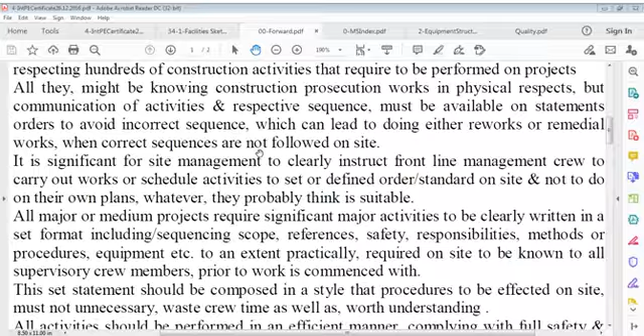It's significant for site management or site organization to clearly instruct frontline organizers, frontline leaders and managers to carry out works.

Written in a set format, including - like what? Number one is scope, references of drawings, references specification, or references manufacturer instruction, or references whatever you think is logical to be included in that paper, that writing. So scope, then references, and what safety methods you are going to adopt for that.

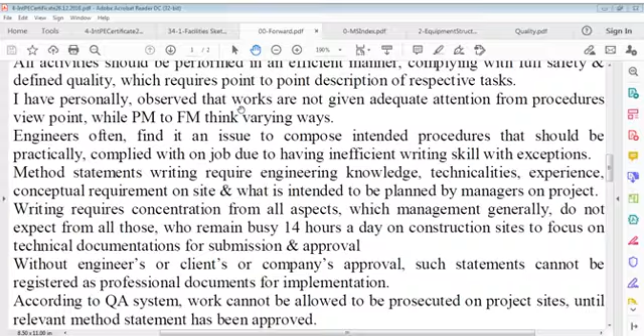Statements. Writing requires engineering, which management generally does not expect from all those who remain busy around 14 hours a day on construction sites, to focus on technical documentation for submission and approval.

Without engineers, clients, or companies' approval, means whatever is written must be approved by all. It should be approved by the company or client, the engineer, and of course whoever is involved, and the contractor has already approved it by submitting this method. If the contractor submits it, or if a third party submits it, then the third party is at their own expense.

So we can say, simply, according to the QA system or QR system, work cannot be allowed to be prosecuted on project sites until the relevant method statement has been approved. These two lines: without engineers', clients', or companies' approval, such statements cannot be registered as professional documents for implementation. And according to the quality system, work cannot be allowed to be prosecuted on project sites until the relevant method statement has been approved.

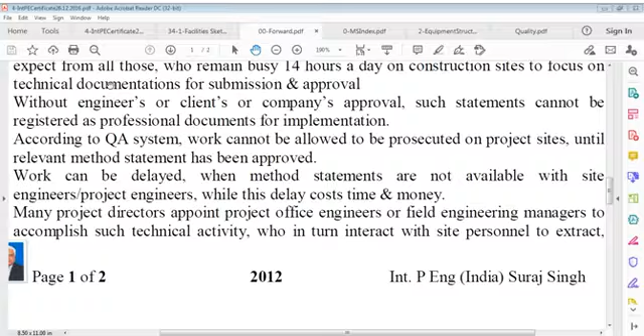Points are noted like a journalist or reporter, and a statement is composed based on collected information. Method statement writing activity requires thorough knowledge about the job in consideration, which are contract requirements - what are contract requirements, what is drawing details, what are all these drawings.

You can say that specifications involvement as industrial practice, and inquiry records such as site technical queries or engineering queries, etc., move together with the project, and all form a basis to complete all columns on the proposed statement, leading to delivery of professional documents to be reviewed by the contractor's management organization, including quality, safety, and to be disposed of for final approval by the engineer or client.

Once a statement is approved, it has to be complied with in letter and spirit as part of contract procedures. While it's a case of proposed deviation, a revision should be issued.

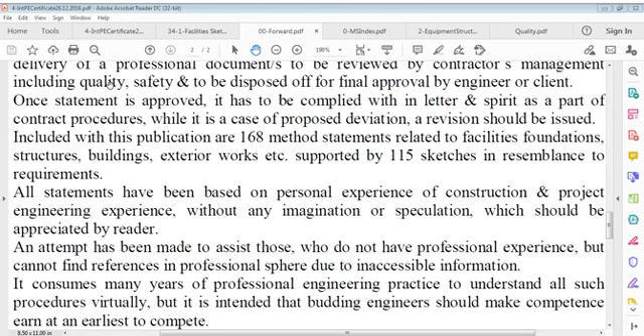Once a statement is approved, it's to be complied with in letter and spirit as a part of contract procedures. While it's a case of proposed deviation, a revision should be issued, included within this publication. There are many other statements that I'll share with you - structures, building, exterior works, etc. shall be included, supported by many sketches in resemblance to requirements.

All statements have been based on personal experience of construction and project engineering experience. Project engineering experience has to put you in trouble - meaning you have to think a lot, write a lot, understand a lot, just to see job success. All statements have been based on personal experience, again I say, personal experience of construction.

All statements have been based on personal experience of construction and project engineering experience, expertise without whatever imagination or speculation, which should have been appreciated by you people, the reader.

Now this was written long back. An attempt has been made to assist those who do not have professional experience or do not have practical requirement knowledge. It consumes many years of professional engineering experience and practice to understand all such procedures virtually. Otherwise, that person is outside.

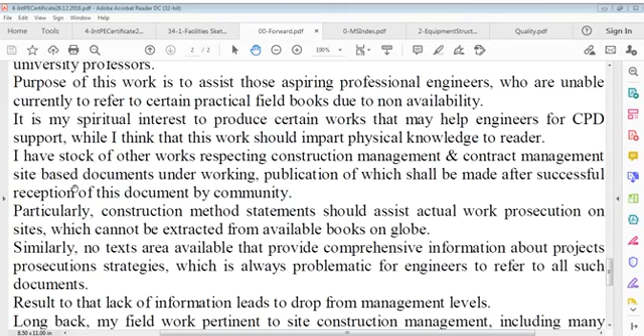No texts are available that provide comprehensive information about projects prosecutions strategies, which is always problematic for engineers to refer to all such documents. A result of that lack of information leads to drop from management levels.

Long back, my field work pertaining to site construction management, including many engineering hand-drawn sketches respecting complicated site fabricated formwork etc., was published by CBS in 1996, which can also be referred to for more details. Materials and vendors' names included somewhere are indicative only and no recommendation. Hope this suffices.

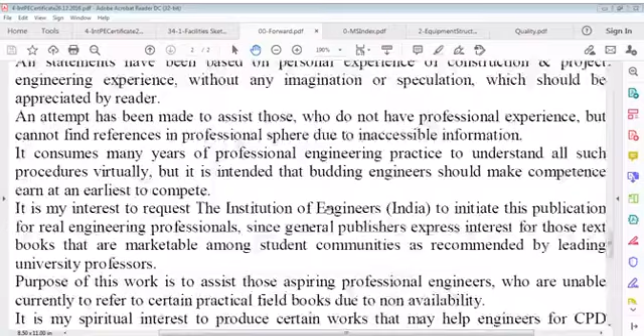This introductory note is just to refer to how this word lies here. What it says, that's more important. Now what actually we are going to talk about, that's also a point. We may see here.

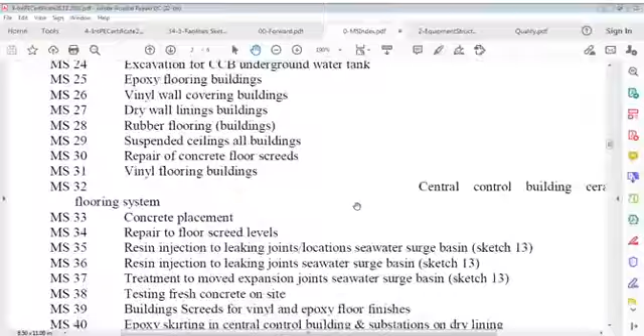This is a kind of scheduled pertinent 168 method statements included within the following chapters: site environment management, then equipment structure, excavations and crossings, buildings and plants, non-plant buildings, infrastructure, then external works and utilities.

These sketch titles, a list of title sketches, are self-explanatory and can be linked to all method statements for a better understanding, but all these are indicative only. I'm just giving sketch names, not numbers, because I'm interested in what the titles are, sketch titles. It's not titles of procedure, no.

Trench excavation safety, railing and ladder - this is one very important point. Safety is endangered while excavating trench, so this is that requirement. Then we have excavation safety of a major building with ordinary foundations without ramp, excavation safety of a major building with ordinary raft foundation with ramp, and excavation safety of a major building with benchings, firm foundation with ramp and diverting well point system.

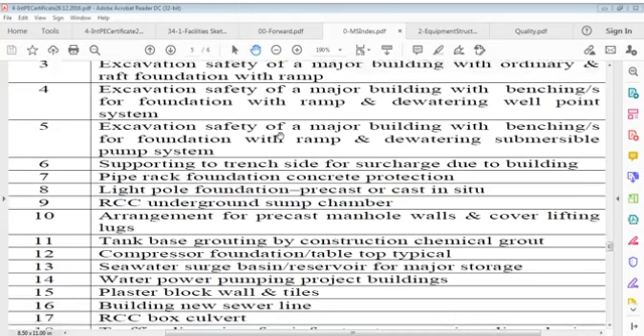Then excavation safety of major building with benchings in foundation with ramp and dewatering submersible pumps. We say supporting excavation safety of major building with benchings for foundation with ramp and dewatering submersible pump system. Then supporting to trench side for surcharge due to building.

Pipe rack foundation concrete protection. Light pole foundation precast or cast in situ. In RCC, underground sump chambers, arrangement for precast manhole walls and cover lifting lugs. Then tank base grouting by construction chemical grout - tank base grouting it is. So it says tank base grouting by construction chemical grout. Before that was arrangement for precast manhole walls and cover lifting lugs.

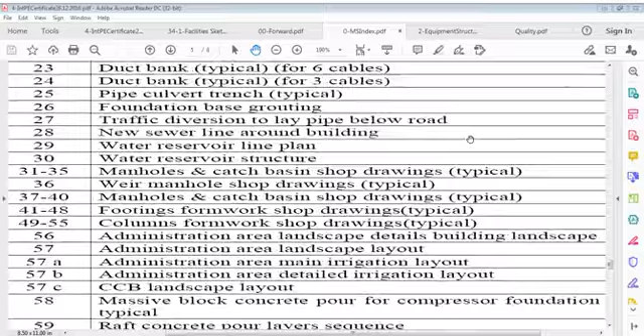It's always easy to say something without thinking, just to speak because I did this and that's only right - no. Technical work means scrutiny and scrutiny and scrutiny: self scrutiny, other party scrutiny, third party scrutiny. There may be people coming in joining engineering and also currently launching.

We have to keep ourselves immersed in such scenario because concentration is very important. It's not simply that I say or somebody else - it's a requirement of deep thinking, not shallow.

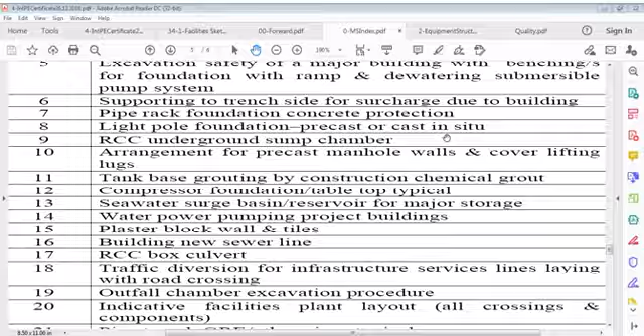So there are so many, you can say, long titles, short titles. You'll come across this as we move forward. There are about 108 here.

Quality is ultimately the aim to achieve. We can't cheat ourselves - we can't say we have done it or not done it when we don't do it. We have to do it, only then can we say we have done it. We have to think of what to do, what not to do.

Again, I am referring to past writing. After all, 50% I say it could be more budget that goes to projects and methods and titles, which is an economic interference, an economic impact on that.

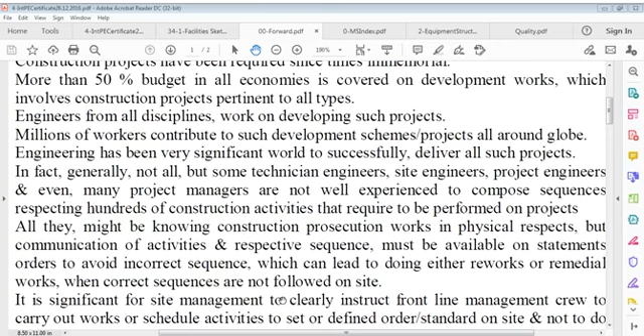It's now very clear that we have to understand it's important. It's very clear in this respect. I'll be back within a couple of minutes. Just a moment, please.

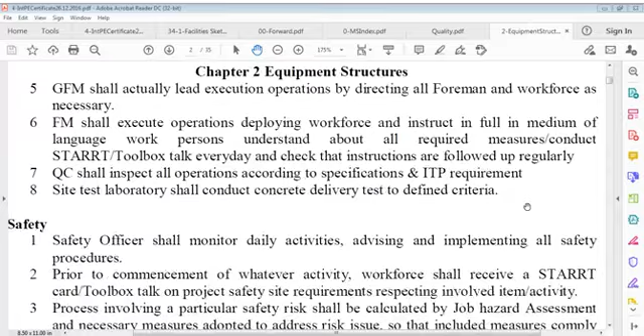Now let's start this. Some important points I was browsing through for your reference. Now, it's very important: building practice for professionals, construction method statements, chapters, equipment structures. This is chapter 2, it is all important information, you have to concentrate on this. It's very important one, and this is equipment structures, safety general.

Refer to chapter 3, that's MS 12 and 13, chapter 4, MS1. Then chapter 6 for general provisions on safety disciplines, in addition to those included with various method statements on this chapter.

So let's see what to talk of for general provisions on safety disciplines, in addition to those included with various method statements on this chapter. Let's see, I'll come back on this. Let us see whether relevant point should be extracted from description in line with requirements on relevant activities.

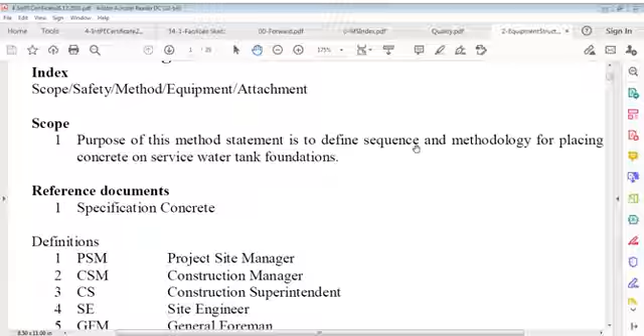Then definitions: PSM, CSM, CS, SE, GFM, FM, QC, SO. PSM is project site manager, CSM is construction manager, CS is construction superintendent, SE is site engineer, GFM is general foreman, FM is foreman, QC is quality control, SO is safety officer.

Responsibilities: PSM shall control overall operations. The project site manager has to control everything, respecting site management controls or site organization control. CM, construction manager, shall arrange resources required accordingly and act as overall responsible for ongoing operation. CS, construction superintendent, shall control, monitor, and direct site engineer, foreman, and workforce for operations.

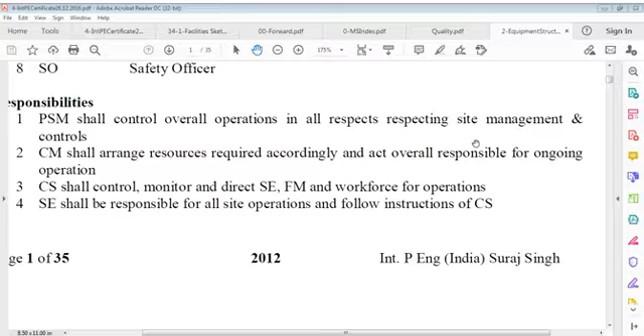Site engineer shall be responsible for all site operations, following instructions of CS. And of course, other designations, say for example GFM, general foreman, shall lead execution operations by directing all foremen and workforce as necessary.

FM, foreman, shall execute operations, deploying workforce and instructing in the medium of language the persons understand, about all required measures, conduct STARRT toolbox talk every day and check that instructions are followed regularly.

Quality control operations shall inspect all operations according to specifications, and ITP requirements, to make sure that all works are done meeting specification and ITP requirement. Site test laboratory shall conduct concrete delivery tests to defined criteria.

Now regarding safety, because safety is also a mandatory part of construction, safety officers shall monitor daily activities. Safety is the responsibility of everyone, so this is inserted for the purpose of reminding, for the purpose of mandating that safety is a must, and safety officers shall monitor daily activities, advising and implementing all safety procedures.

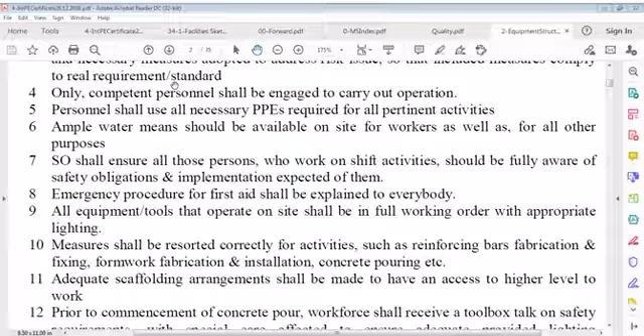Emergency procedure for first aid shall be explained to everyone. All equipment and tools that operate on site shall be in full working order with appropriate lighting.

Measures shall be resorted to correctly for activities such as reinforcing bars fabrication and fixing, formwork fabrication and installation, and concrete pouring.

Adequate scaffolding arrangements shall be made to have access to higher levels to work safely. Prior to commencement of concrete pour, the workforce shall receive a toolbox talk on safety requirements, with special care taken to ensure adequate lighting arrangements are provided.

Plan to use 2 tower lights, each with 4 1000-watt bulbs.

Access platforms shall be provided all around ground beams. On the outside formwork, 2 aluminum ladders shall be placed at opposite ends to reach access platform from ground level. Access platforms shall be provided with handrails all around for working safely.

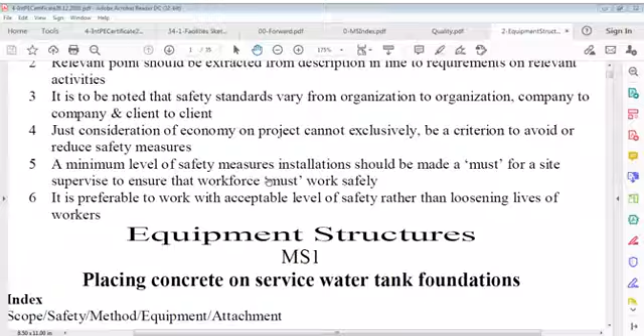Methods. Just a minute, let me see what sketch it was. Yeah, I'm finding it here. Let me go and see the sketch method, I'll come back to method. Define some sketches, let us see. Where is that? That is somewhere here, I think. Yeah.

Chapter 3, MS 12 & 13. This is chapter 4, MS1, chapter 6, page 1 for general provision, safety, discipline, and addition to the... let us see what it was. Let me be clear about this. Taking it. Chapter 3, MS 12 & 13, let us see chapter 3.

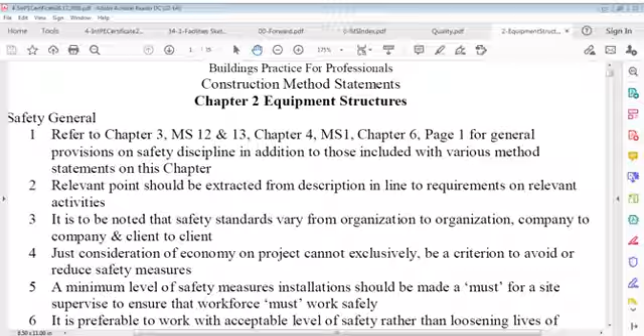Okay, I'll go back to method first. The document is currently not traceable. Let us first understand what this is, what the method says.

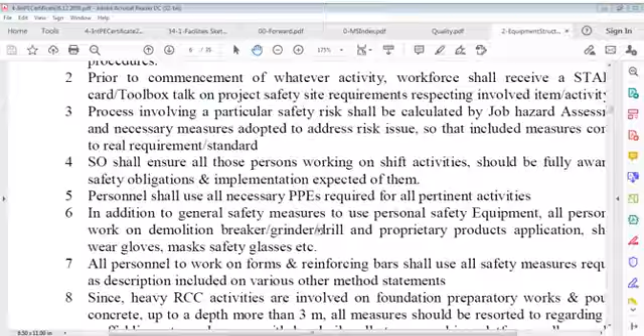Preparatory works for foundation, sketches 60. Up to here we had gone. So safety we had gone through. Structure, this we have seen. Responsibilities we have seen. Then let us see chapter 2.

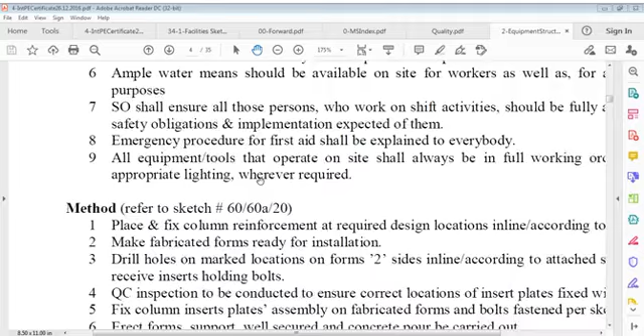Yes, I'm talking about this one. This is other equipment, tools, operations, all in full working condition. We are here, I am sure we are here. This we have done.

Yes, we had to move from here. Now preparatory work shall be carried out for formwork in circular profile, for which due provision should be made for specialist form. This we have done already. Safety we have taken, and now to method.

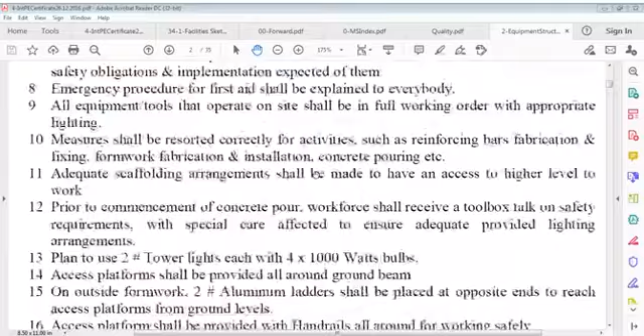Preparatory works shall be carried out for formwork in circular profile, for which due provision should be made for specialist form. This form shall be well supported and anchored to resist expected forces during pour. As a parallel activity, reinforcing bars shall be placed and fixed in correct position, duly inspected. It is proposed to cast the ring beam in 2 pours. Stop-end forms shall be placed at opposite locations across full width and depth to establish construction joints.

Concrete shall be poured in sections in one go, 300 to 450 mm high rounds, and compacted with suitable vibrators. Care shall be taken to ensure that concrete is placed and compacted in its final position within the time permissible from the time of batching, in accordance with the concrete production specification, which may generally be 1 to 2 hours.

Concrete delivery shall be planned according to quantity and pour duration to enable a smooth concreting operation. Concrete shall be continually poured from start to finish of the pour. No cold joints shall be allowed to form, and flash setting of concrete should be avoided by spraying water on forms and rebars so that both items are kept at a temperature lower than air temperature.

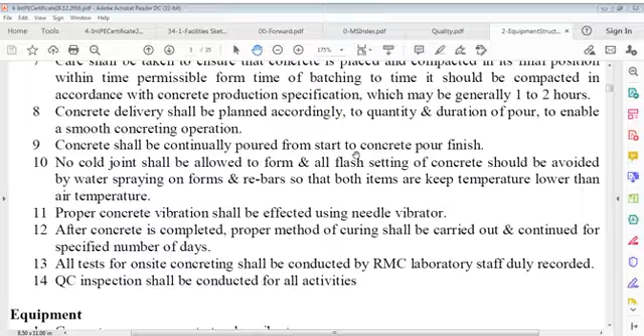Proper concrete vibration shall be effected using a needle vibrator after concrete is placed. Proper method of curing shall be carried out and continued for the specified number of days. All tests for on-site concreting shall be conducted by ready-mix concrete laboratory staff, duly recorded, and QC inspection shall be conducted for the concrete pump, concrete trucks, vibrators, etc. This is all that I can say.

This is the equipment structure.

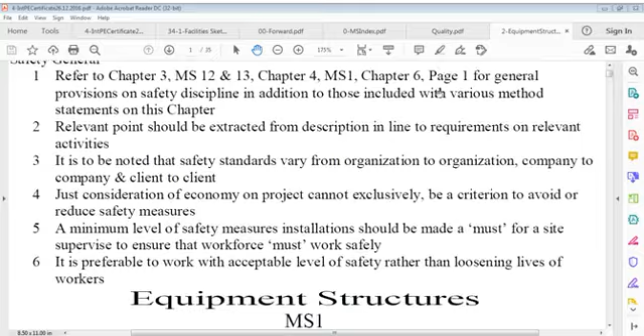Compressors, structures, RC column plate inserts. Let's see what the contents are. We'll discuss sketch 60, 60A and 20. Sixty A and 20, we'll open them.

Before this, let me give you a sketch again. It's a very important sketch. Close this file. This is about lift formwork. Just for reference, I'm giving this because I had to close this file, and by chance I opened this just for you. This is lift, and this is your lift door.

Section of this shutter, these are shutterings. I'm giving shuttering on elevation A, B, this elevation A, this elevation B, this elevation A, like this. These elevations are here. You can see how this is framed in 1, 2, 3, 4, 5, 6, 7, 8 spaces here, and 8 spaces means you have to do formwork like this, and 8 spaces means 50-50, that's it's 4 meter high. So 50-50 centimeter, half a meter, and this is positioning support. This is also a kind of positioning here, you can see.

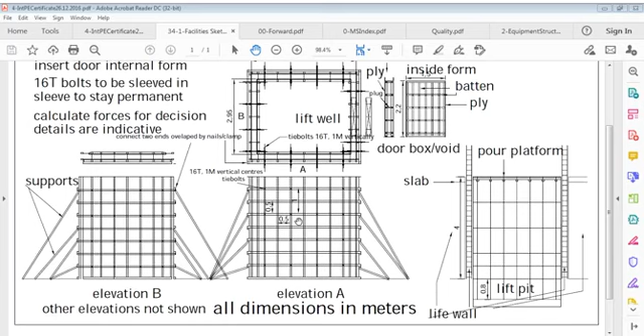It's very complicated work, and I explained you about pouring of this, but this work itself is very voluminous, because what you see, one panel, one side, two side, three side, four side, five side, six side, seven side, eight side, 8 big panels, or many panels in one.

See, 4 meters itself is the height. 1.2 means 4 ply must be here vertical, 4 side, 4 ply, then 4 ply here vertical. This is 2.4, so 2.4 and another one. So how many plywood are you going to use? That's the question. Let's say 4 average, 4, 1, 16, and this is 3 average, 12, 16 and 12, 28. 28 meters is the length itself, which means you can say 28 ply itself.

So it's a voluminous work, since there's a lot of work in this lift well. So it was just kept for your explanation. I will close this now, because there's no need of this anymore. This was for your information. That's gone now. I'll open this sketch.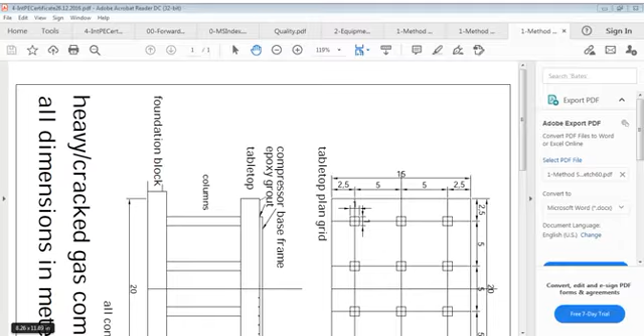60A, sorry, I think I wrote the wrong one. This is 60A. I think I wrote the wrong one here, no problem, we'll close this. This is columns, inserts. This one is okay, and this one is plating standards.

Standard one here, base plate, stiffness, and of course, let's get 61A, and this is works. I'll try to... you can say here this is because...

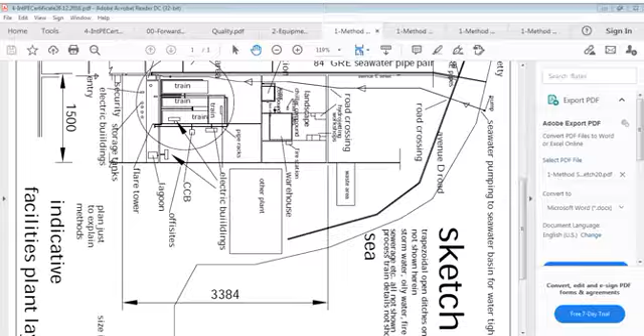I have shown before also this, but again this is a sketch of a plant, a big plant here, and we are talking somewhere here, somewhere here, somewhere here, and we are talking about this process area and main area of this plant. This is the original refinery plant. This is a subsidiary. This is kind of by-process. This is a real process, and there are so many contents here.

I have to close. Let me close this one. All right, so now let's move this way. It's okay, and let's move this way. It is also okay.

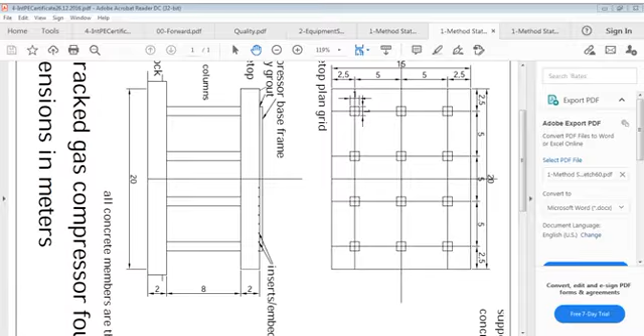Okay, we have these three sketches now. We'll read our statement and close this.

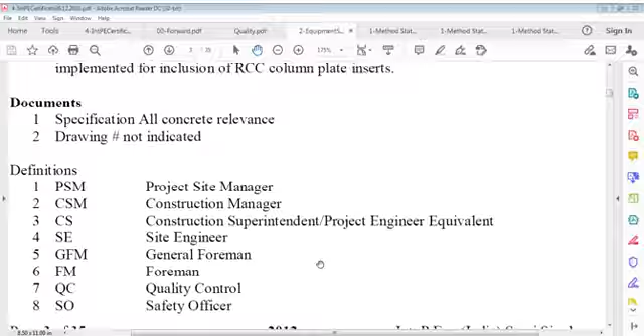Okay, now what it says, let us start again. Equipment instructions say compressor structure RCC column plate inserts. We're talking of compressor structures, compressor structures RCC column plate. Where is that? First of all, let's see where is that in this.

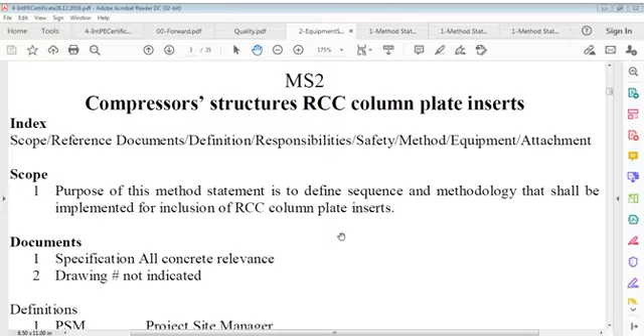Purpose was to show this first, so we can go back to our point. It says scope, indexes, scope, reference number, reference documents, definitions, responsibilities, safety, method, equipment, attachment. All these are scope, you can say: documents, definitions, responsibilities, safety, method, equipment. These are here.

Purpose of the statement, the scope, is purpose of the statement, is to define sequence and methodology that shall be implemented for inclusion of RCC column plate inserts in documents are specification, all concrete relevance and drawing number not indicated herein.

And here definition is same as we did before. PSM is project site manager, CSM is construction manager, CS is construction superintendent or project engineer equivalent, or you can say site engineer, GFM general foreman, FM is foreman, QC is quality control, SO is safety officer, and we have to see these responsibilities as before.

PSM to arrange all materials, control over all operations in all respects, site management, control, and construction manager to arrange all resources required accordingly and act overall responsible for ongoing operations, and construction superintendent to control, monitor, and direct site engineer, general foreman, and workforce for operations. SE responsible for all site operations and follow instructions of construction superintendent.

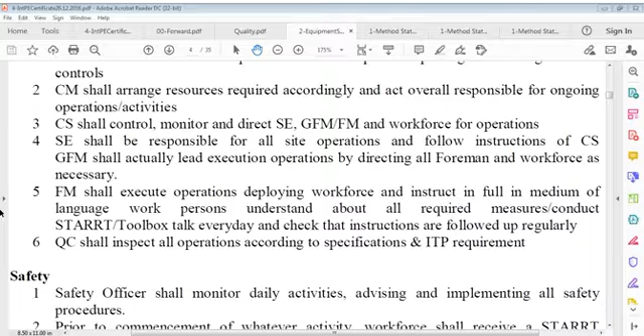QC shall inspect all operations according to specifications and ITP requirement. Safety officers shall monitor daily activities, advising and implementing all safety procedures.

Prior to commencement of whatever activity, workforce shall receive a STARRT card, a toolbox talk, safety task and review. That's the STARRT card, given to people to understand safety task analysis and review technique.

So the STARRT card, toolbox talk on project safety, site requirements respecting involved items, activity, process involving a particular safety task. Safety risk shall be calculated by job hazard analysis or assessment, and necessary measures adopted to address risk issues so that included measures comply to requirement or standard.

Only competent personnel to be engaged to carry out operation. Personnel shall use all necessary personal protective equipment. PPE is required for all pertinent activities. Ample water means should be available on site for workers as well as for all other purposes.

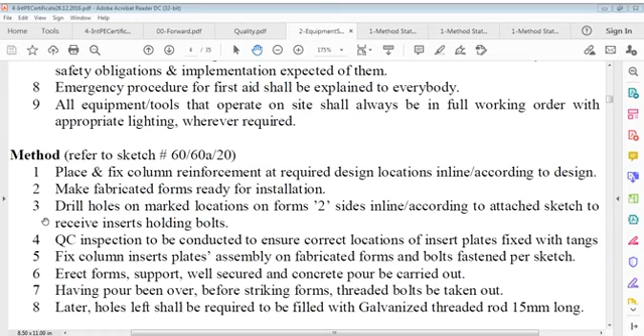Now the sketches I'm going to show refer to sketch 60, 60A and 20 here in our case, and this is sketch 20 here, which you have seen. This is for whole layout of plant. This is very important one, layout of plant. Then the other one is for compressor detailing. This is for steel plate inserts.

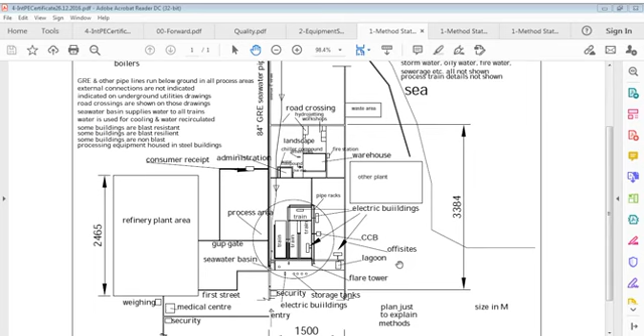These sketches are here, you can read this if you wish in 5 or 10 minutes. I'll give time for this. Have a look at this. Still blown up, I will look at this. Meanwhile, just 5 minutes please, because it takes time. You read it yourself better. I'll be back.

This is an interesting sketch, and you must understand this. This is a professional sketch. It means for a plant, for some, it's a byproduct plant. It's not just a plant. It must be well understood before talking further. If you read it, you can get much more than what I can explain to you.

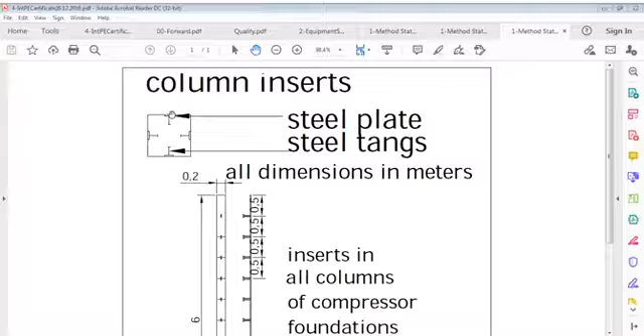Now, these are tanks here, you can say. On these plates, these are tangs, and this is fixed on all 4 sides of this, you can say. All 4 sides. Steel plates, this is steel plates, and these are steel tangs.

Place method is: place and fix column reinforcement at required design locations, in line according to design. Means fix column reinforcement at required design locations in line according to design.

Make fabricated forms ready for installation. Form drill holes on marked locations on form 2. Forms 2 sides in line according to attached sketch to receive inserts holding bolts. That's for column inserts, that is plate and tangs.

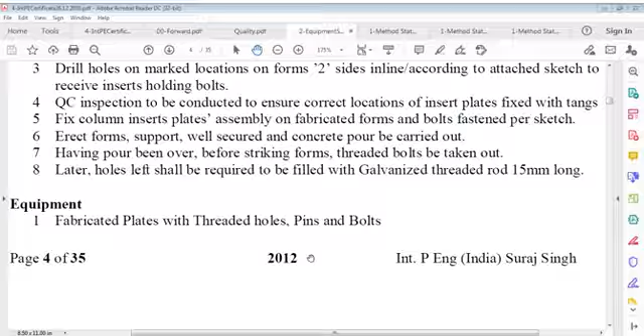This is one crack test. The sketches are there which is included now. This is cracked gas compressor massive foundation concrete pour. Actually this is more important. This is second one, no problem, it's come before that. It doesn't matter. Now scope, reference documents, definitions, regular responsibilities, safety methods, attachment.

pour pertinent to cracked gas compressor foundation, which foundation is a considerable size massive block. A heavy equipment compressor tabletop shall rest on it in dynamic mode, transmitting working vibrations and amplitude to it, which forces this foundation work would be required to dampen. This foundation shall be considered to be a massive element, which means that during concrete pouring, temperature controls apply, cracking prevention controls apply, curing controls apply, and overall pouring controls apply.

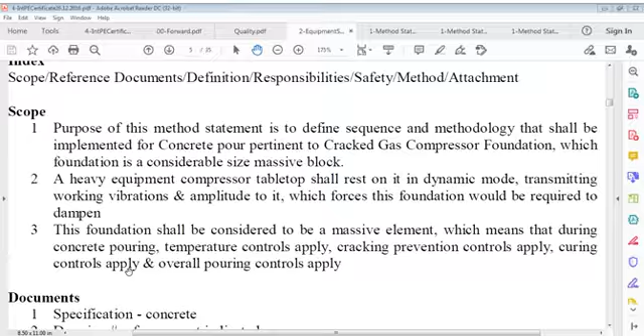Foundation shall be considered a massive element, meaning that during concrete pour, temperature controls apply, cracking prevention controls apply, curing controls apply, and overall pouring controls apply. Documents, specifications of concrete and drawings reference not indicated, designations, and these are the same, and responsibilities too are the same.

Safety officers shall monitor daily activities, advising and implementing all safety procedures, prior to commencement of whatever activity. Workforce shall receive a start card or toolbox talk on project safety and site requirements respecting the involved item activity.

Process involving a particular safety risk shall be calculated by job hazard analysis or assessment, and necessary measures adopted to address the risk issue so that included measures comply with the required standard.

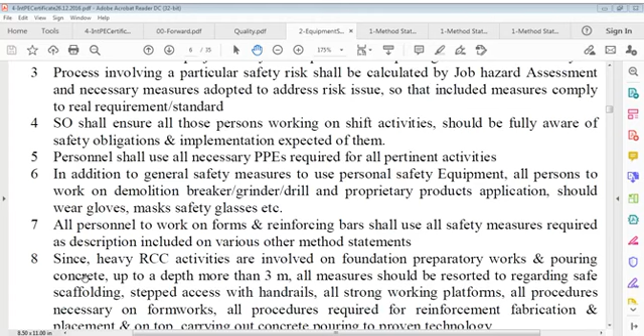Safety officer shall ensure all persons working on shift activities are fully aware of safety obligations and the implementation expected of them. Personnel shall use all necessary PPEs required for all pertinent activities, PPE meaning personal protective equipment. In addition to general safety measures, all persons working on demolition, breaker, grinder, drill, and proprietary product applications should wear gloves, masks, and other required equipment.

All persons who work on forms and reinforcing bars shall use all safety measures required as per description.

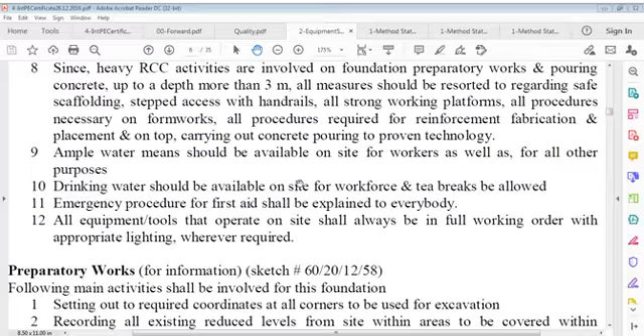Now we go to preparatory works, for information and sketches. That is document 60/20/12/58, preparatory works. Let us see what those are.

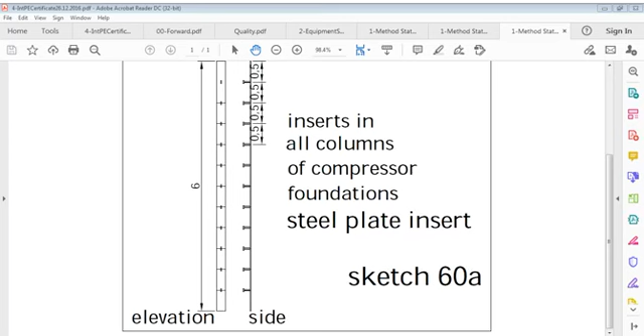Let us see, it's 12.

It says the following main activities shall be involved for this foundation, and other activities. Let us first see what the foundation is, this sketch.

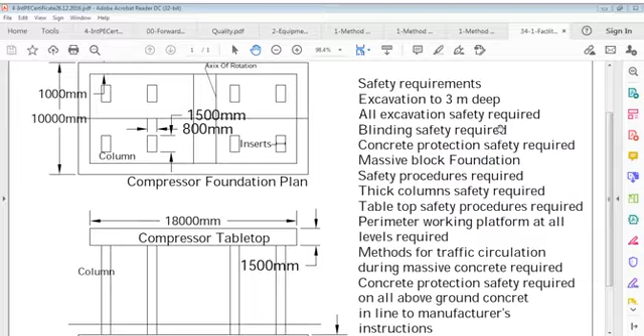Now it says safety requirements: excavation to 3 meters deep. This excavation we have to do here. Then all excavation safety is required, blinding safety is required, so excavation safety is required here. In this excavation of 3 meters deep, excavation safety required, blinding safety required, concrete protection safety required, massive block foundation safety procedures required, then

Concrete, of course, according to manufacturer instructions.

Say that this is our 1258. Now, setting out required coordinates at all corners to be used for excavation.

Setting out is important. Let us see 58, where is 58? I'm not finding it. 51, 52, 53, 54, 55, 56, 57. We see 60, 61, so it's not available in this case. I think...

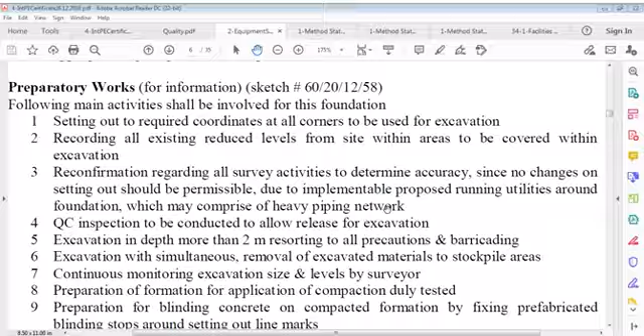Setting out to required coordinates at all corners to be used for excavation, and recording all existing reduced levels from site within areas to be covered within excavation. Reconfirmation regarding all survey activities to determine accuracy, since no change on setting out should be permissible.

Running utilities around the foundation which may comprise of heavy piping network. So whatever layout is given in our details must be complied with on site. No tolerance, no deviation, nothing, because there could be any pipe running around.

Apply all precautions and barricading around site, and removal of excavated material to stockpile areas. You have to excavate, and at the same time, removal of excavated materials to stockpile areas. Simultaneous means the excavation is simultaneous with removal of excavated material to stockpile areas. Continuous monitoring of excavation size and levels by surveyor. Preparation of formation for application of compaction duly tested. Preparation for blinding concrete on compacted formation by fixing prefabricated blinding stops around setting out line marks.

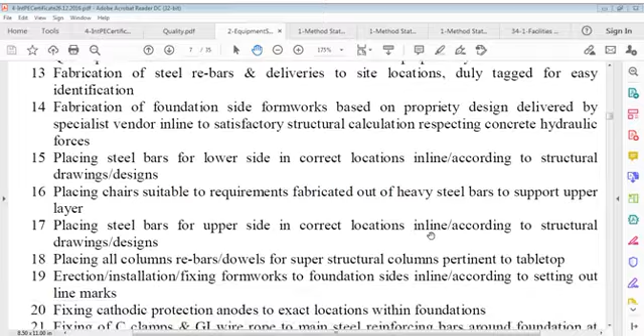Preparatory activities: fabrication of steel rebars and deliveries to site locations duly tagged for easy identification. Fabrication of foundation side formworks based on proprietary design delivered by specialist vendor in line with satisfactory structural calculation respecting concrete hydraulic forces.

Placing steel bars for lower side in correct locations in line... it is fabricated out of heavy steel bars to support the upper layer. Placing steel bars for upper side in correct location in line according to structural drawings and designs. Placing all columns, rebars, dowels for structural columns pertinent to the tabletop.

Erection, installation, fixing of formwork to foundation sides in line accordance to setting out line marks. Fixing cathodic protection anodes to exact locations within foundations. Fixing of C-clamps and GI wire rope to maintain steel reinforcement in line to design provisions. Electrical containment

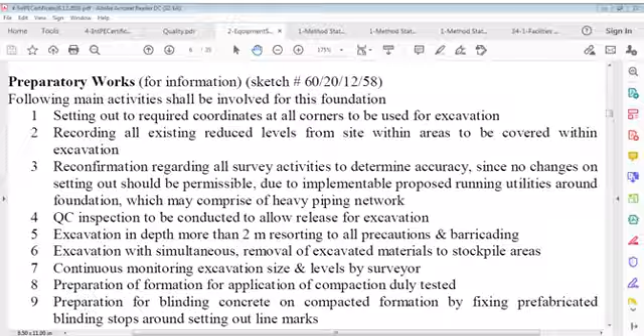Okay, I just like to take a print of this so that I can show you this. Maybe. Okay, that's okay, fine. This is, let us say, file saved as it is.

So this you can see. Before going further, I'd like to show you this, it's a very important point here. I try to show something here, how to calculate pressure

on formwork. It's a simple calculation formula that can be used on site for column formula. This is for column, but it can be used. The basic formula is here. What it says is building practices chapter 13: density, layer height, column width, column depth, pressure per meter, moment per meter, pressure per meter, bending moment per, then moment on width, moment

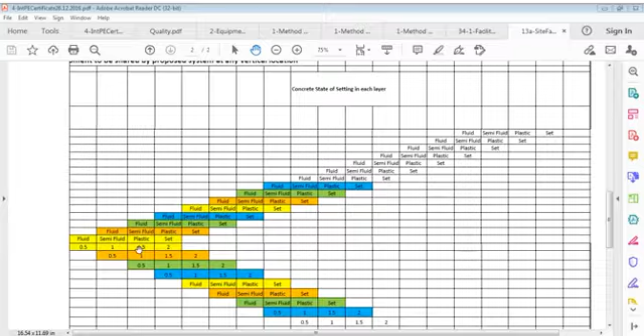This is how the pressure graph moves. You can see here it's fluid at one time, then 0.5 fluid, then semi-fluid, then 0.5, 1 meter, 1.5, 2 meters like this. Its state keeps changing. See this 0.5 fluid, then 1 meter semi-fluid, fluid - so if fluid changes to semi-fluid, it's shown like this. I'll discuss this later, but now I'm just trying to show you how we could calculate that.

This I take in case of columns, taking density same, with layers - this is bottom layer and this is top layer. Let's say 15 layers are there for 6 meter height. This is 1, 2, 3, 4, 5, 6. Layer height is 0.4 each, so this is 6 meter height, 0.4 times 15 layers. Column height let's say 0.4, starting from top and going down. This is 6 meter. Column width is 80 and column depth is 50, and this is pressure WH squared over 2.

It's a very important point, so we should take this also into our consideration. We'll check this later on - just trying to show you that this also works. That's an important point, and we have to then see that we could, of course, there. Now our purpose was not that actually, just trying to show you something in this.

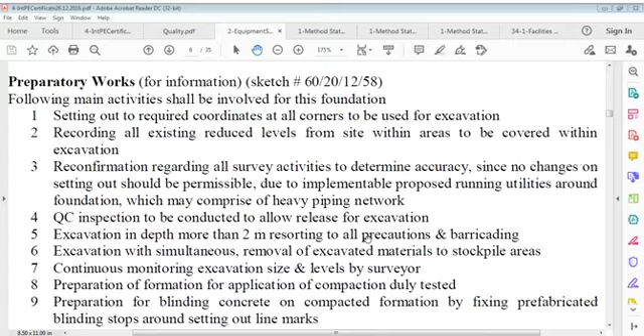Now, where are we standing in preparatory works? We are standing in preparatory works. Preparatory works means formwork, and I'll read it again because it's a very important point here, very important in the preparatory works case. The following main activities shall be the main activity. Number one is setting out the required coordinates at all corners to be used for excavation.

That is setting out the required coordinates for excavation, meaning all corners, and then recording all existing reduced levels of the site from within the excavation area. Now we have to reconfirm what survey activities - reconfirmation regarding all survey activities to determine accuracy, since no changes on setting out should be permissible due to implementable proposed running utilities around the foundation.

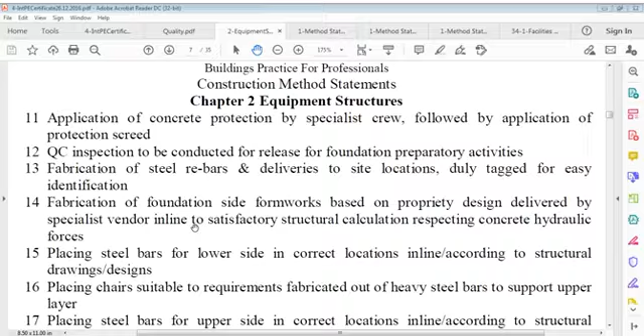Carrying out blinding concrete to approved procedures, followed by curing for a minimum of 2-3 days. Application of concrete protection by specialist crew, followed by application of quality inspection to be conducted for release of foundation preparatory activities. Fabrication of steel rebars and delivery to site locations, duly tagged for easy identification. Fabrication of foundation side formworks based on proprietary design delivered by specialist vendor, in line with satisfactory structural calculations respecting concrete hydraulic forces. Placing steel bars.

See this - fabrication of foundation side formworks based on proprietary design delivered by specialist vendor, in line with satisfactory structural calculations respecting concrete hydraulics, which I just showed you in the Excel file converted to PDF. Those calculations mean what resistance they have. If you want proprietary yourself, you have to calculate forces, which could be found out from that file I showed you. Again I can show you this - this file is there, this I showed to you. From this we can find out about the requirement.

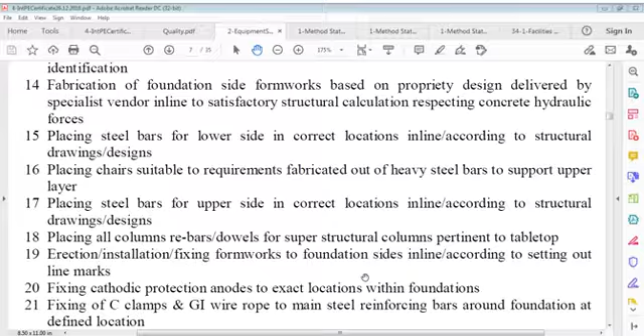Critical cathodic protection shall be designed to design provisions. Electrical continuity testing shall be conducted for records and submission. Continuous QC inspections should be conducted for all ongoing activity sequences. When all preparatory works, including temporary works, are ready...

Approximately, quantity wise, pour plan in steps - courses of each 15 into 2 into 0.4 meter, that is width wise 12 cubic meter each. Sequence of steps shown in attached details in numbers. Time of pour commencement, which is suitable, and plants: concrete pump 2 numbers, batching plant full time 1 number standby 1 number, transit mixers 10 numbers 7 meter cube each. Delivery continuous at 10 minute interval, pour duration 12 to 14 hours. Equipment: 1 vibrator.

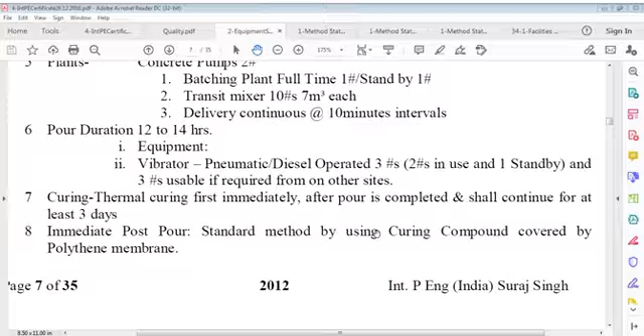Concrete crew: foreman, 2 numbers; steel fixers, 8 numbers; carpenters, 8 numbers.

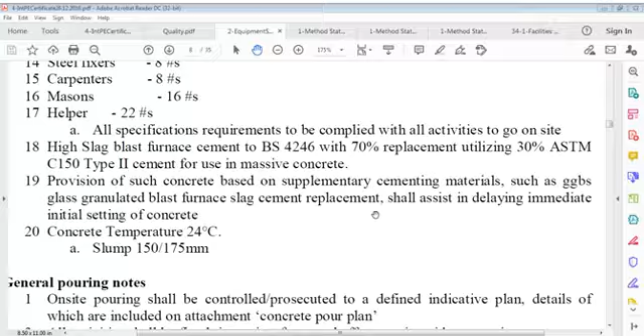All activities to go on site. High slag blast furnace cement to BS 4246 with 70% replacement, utilizing 30% ASTM. C150 type 2 cement for use in massive concrete. Provision of such concrete based on supplementary cementing material. Glass granulated blast furnace slag cement replacement shall assist in delaying concrete temperature, 24 degrees Celsius, and slump is 150, and 175 is high but not more than that.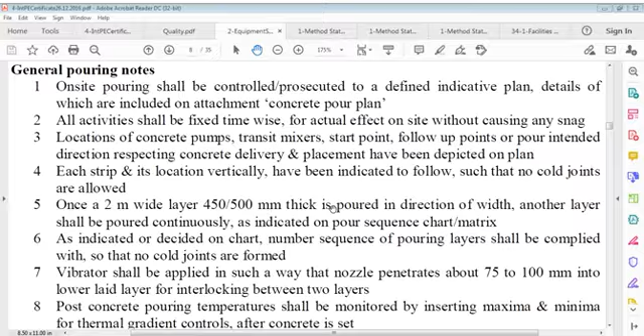General pouring notes. Just trying to move in this direction of a successful pour. I'll repeat all this, I'm just giving you something very important in the method statement, so we can't be in a hurry. We have to understand this is a massive block, so on-site pouring shall be controlled and prosecuted. Let's see how long it is. I can give you some minutes to read if you wish. Oh yes, it is a big one.

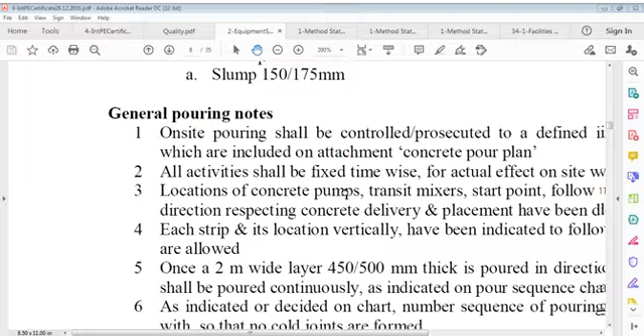So I think you must have gone through this. It's very good that it moves like that. On-site pouring shall be controlled or prosecuted to a defined indicative plan, details of which are included in the attachment, concrete pour plan.

There is an attachment, let us see. Concrete pour plan, I showed you last time, plan of pour. It is not given here, but I will show you for your reference. It's better, I will show you. I had shown you last time some plan. Let me see if it's traceable now.

So it is a sketch, this is not that one. Method statement chapter, sketch is what's going to be shown. Sketch, it is. Method statement chapters, student equipment, quality, method statement sketch. I think... quality, no, it's not that.

I think I lost it somewhere. Maybe, let me find it. It should be somewhere inside this. Not possible that it's not there, it should be somewhere. It's just a matter of a few minutes. And this, storage management problem, storage management. I just want to show you for a second, if you can see that. It's a plan, facilities plan.

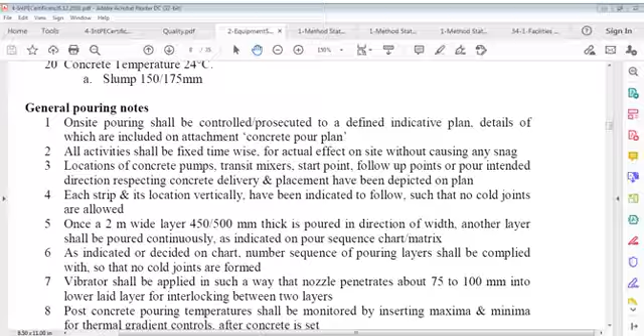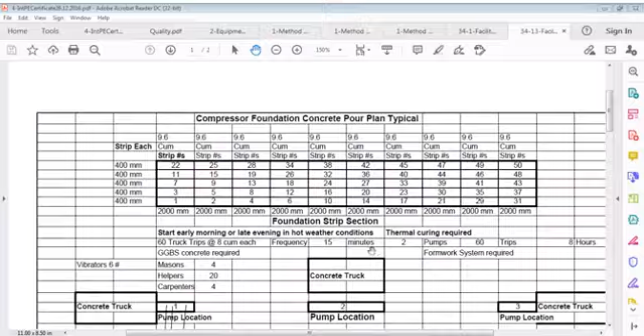Compressor foundation concrete pour plan. This is facilities case, mass block concrete sequence, sketch 58. This was 58, so see, number of confusion. So this is that plan, 58. So I got this sketch here, that is 58. And this is the plan, and this is the plan of foundation. This is foundation, width-wise.

This section, or strips 1 to 50, you can see the quantity in each strip is given here, 2 meters and 0.4. So step one is here, step two here, three here, four here, five here, six here, seven here, eight here, nine here, ten here, like that, eleven here. Then twelve here, thirteen somewhere here, fourteen here, somewhere here. Maybe I don't know where, it's not fourteen here. Then fourteen here and fifteen here, and like this up to 50 you go.

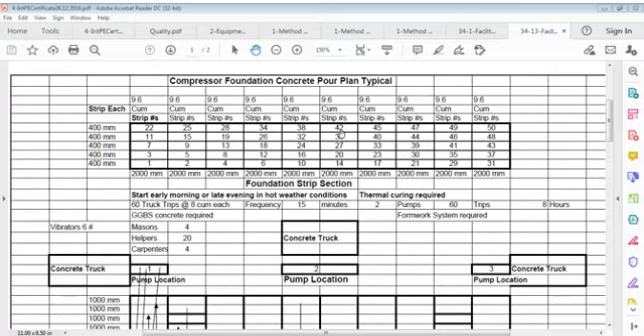So this is the general method, we can say. You can say this method is there, we have to depend on that method, and that's the beauty of this - it has practical resemblance to everything, and it's very important.